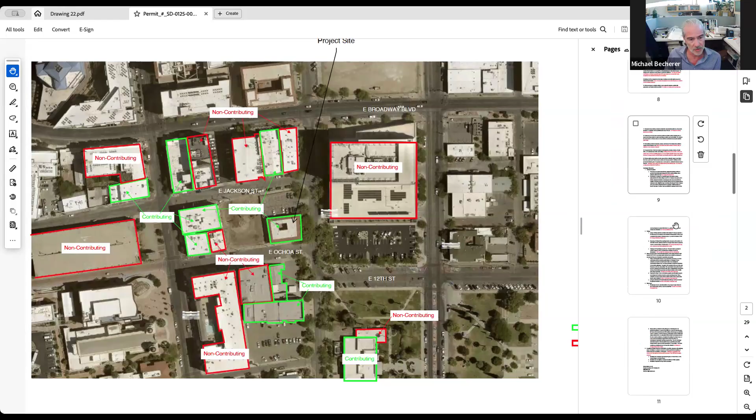If I jump forward a bit here, here's the drawing of the site plan. As I mentioned, to the exterior of the building, we're simply restoring it. The previous review was the minor review for the exterior of this building. The exterior was sprayed with Tuftex, similar to the Marist College, and it has asbestos in it. So we wanted approval to have that removed. We'll be restoring it to more of a sand finish, smooth finish that would have been historically accurate.

The upper band has about a 6x6 tile pattern scored into the stucco, so we're going to be restoring that, along with the crown molding that will all be restored. Everything got sprayed, so the crown molding got sprayed too. We have to take that texture off of everything, but we'll be cutting new crown molding because we can't get that Tuftex off due to the condition of the crown molding.

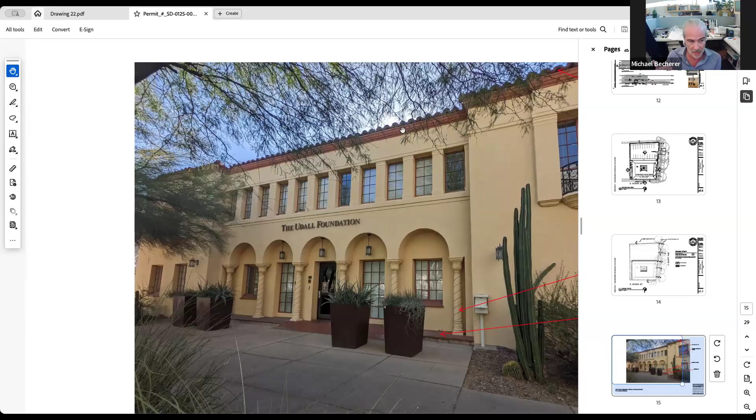But we'll be cutting new crown molding to match the existing, so we'll have a custom blade made to do that.

What you're seeing here is the front of the building. Let me go back to the plan. The building faces Scott Avenue. On the north side, we have the parking lot. The front door is in the center of the east facade, and that's where the modification for accessibility will be. The south facade is on Ochoa. The west facade will now be facing the new 7-story senior housing project going up next door.

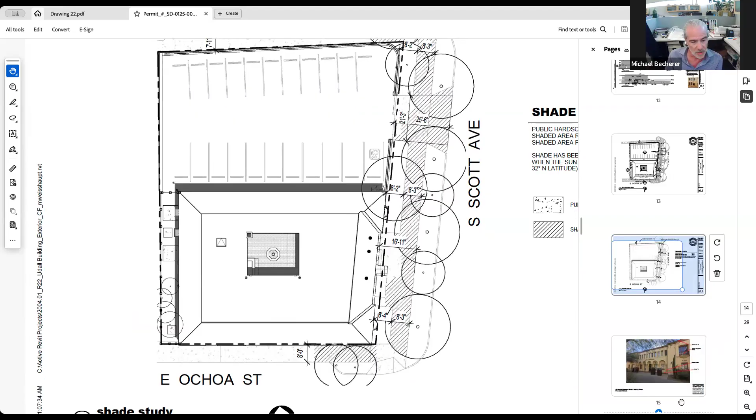From the perspective, this is the front of the building. Hang on just a second, I've got some noise in my background.

Sorry about that. So this is the front of the building. These are the light fixtures we were discussing. If you walk by the building today, we've taken these down as we've been doing work to the building, but we have them. Depending on the outcome of these discussions, we'll determine what we do with those.

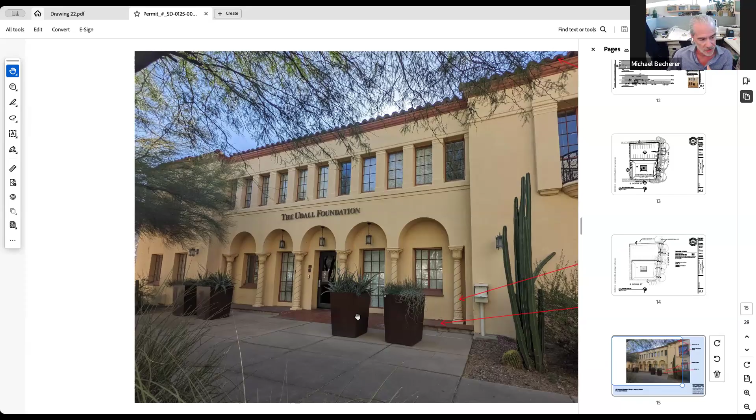The other thing to look at in this photograph is the stoop here. If I zoom in a bit, you can see that at some point in the past there was an actual step that was a stoop, which was then cut out, and a kind of clay kitchen tile was put in to create the slope for accessibility. This is not actually accessible, though—it's much too steep.

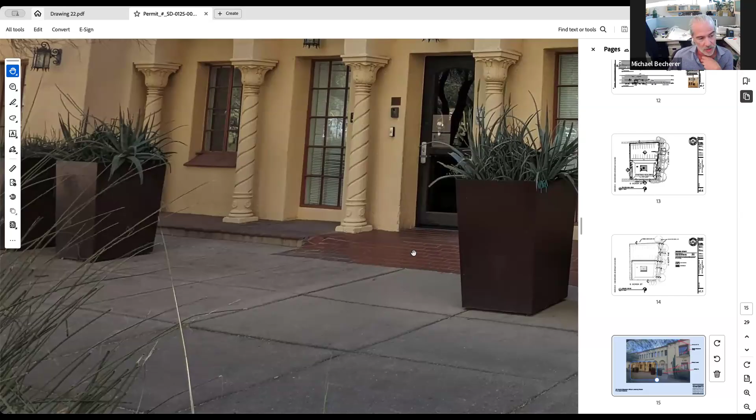So what we have done is go in and basically modify this, and I'll show you those drawings in just a second. I want to give you context of the rest of the building first. From a color perspective, we will be painting the building to match the existing colors, and if we do decide on a color change, we will come back and ask for either a minor review or come back to the commission.

This is the east facade, and this is the south facade. There's another fixture over the back door that didn't come up in the DRB meeting, but full disclosure, that is there, and it's another one we've saved and will reinstall depending on the outcome. And then this is the west facade—again, this facade will be completely concealed once the building next door is complete.

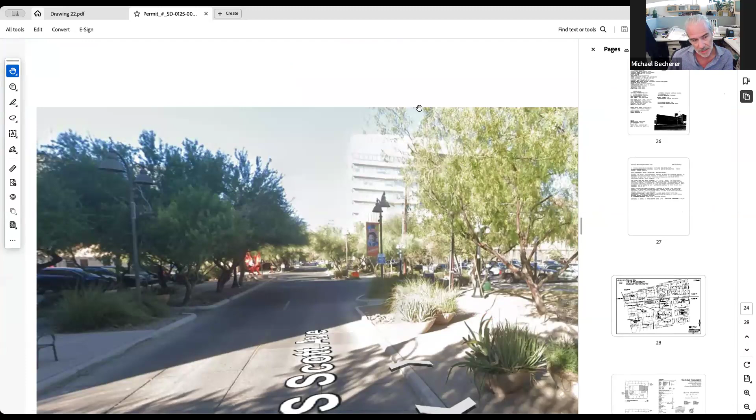And the rest of this is just street context photos. So again, to be completely transparent, because we did the TI, we could not get a certificate of occupancy without having the accessibility resolved. So this design I'm showing you has actually been installed—I'll show you photographs. We understand we did that at risk, so I expect you to review this as if it's a proposal.

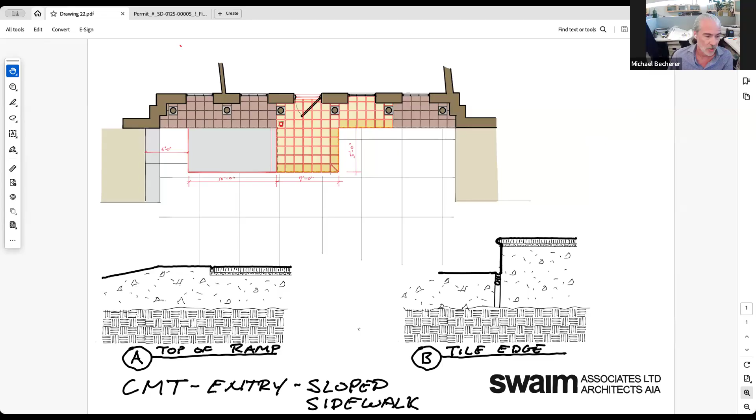I do understand the situation we're in. What we're proposing to do to the front stoop—you can see this darker tile color is the existing tile. The light yellow that was there was all replaced anyway, so we did not remove any original material. What we've proposed is to replace that with Saltillo tile to match the existing. We are extending that out 5 feet and then running a ramp to the south, basically to create the accessibility into the building. Then we have to extend the sidewalk a few feet to get the landing at the bottom of the ramp. So this is less than 6 inches as a rise—basically one step.

Because of that, like other curbs in downtown, no railings are required, and we're not proposing them right now. We've had this reviewed by the building official, and they've accepted our installation as we've proposed it.

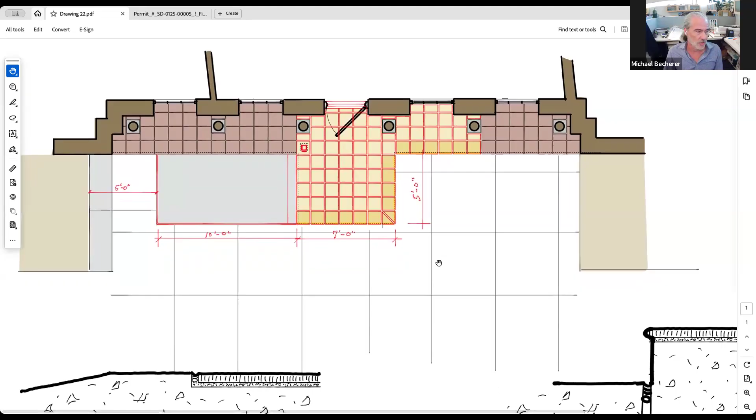Let me stop sharing this and share something else. I do want to show you the photograph of the actual installation.

Oops, that's not what I wanted to do.

That's another reason we did not want to provide a handrail, again trying to minimize the visual impact to the historic building as much as we could. It's just sort of a detail.

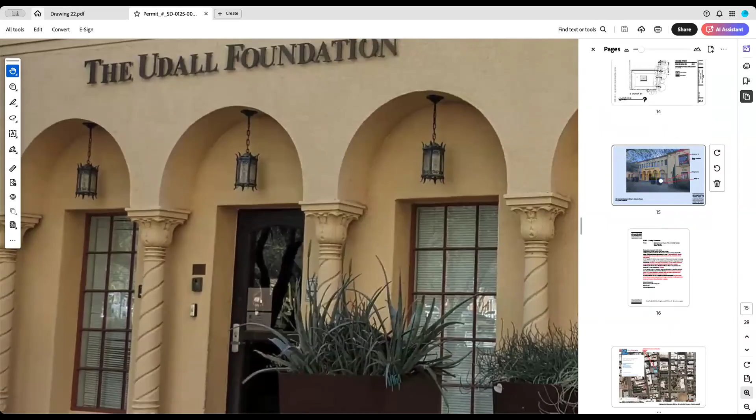As we discuss this—is that pattern glass, Michael? It does have a pattern to it. It's slightly milky and opaque. It's not completely opaque, but it is a pattern glass and has a bit of texture to it.

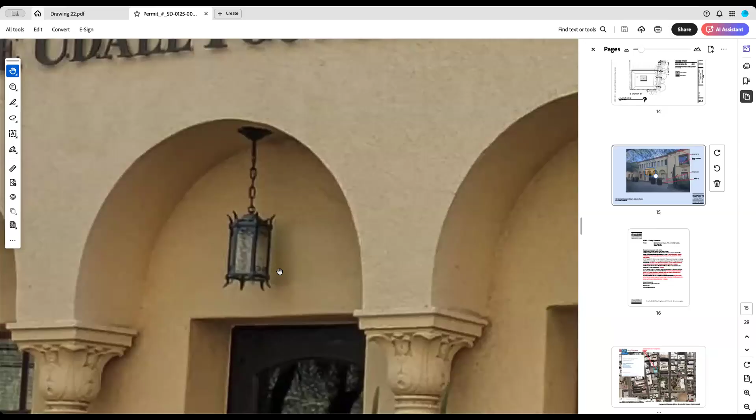Is one possibility that we recommend that you continue to explore ways to get these made compliant? Yes, just wanted to bring that up. That is one option. My intent is I still need to complete the outdoor lighting analysis anyway, so we still need to submit that as part of all this. And if we come back, I don't have a problem coming back and presenting the light fixtures.

Michael, we used - and I can't remember the name - but we used a pretty great fabricator for the courthouse light fixtures who helped with restoration. I'll get with Liz and find the contact and send that to you. They might be helpful, they do a lot of rehabilitation for light fixtures and can get them to comply. I don't know about the dark sky requirement, you might have to put a little shielding in there or something, but it'd be worth seeing. Thank you, Savannah, that'd be great. So that's one thing we could do.

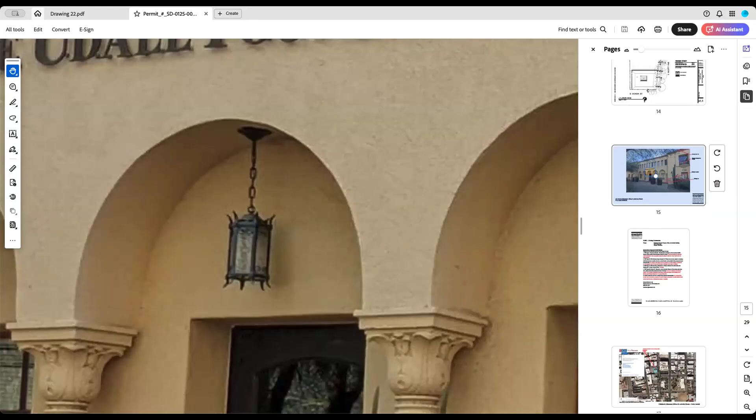So, commissioners, do we have questions about the front stoop, the accessibility, and the thoughts on the light fixtures? Savannah, do you have any other thoughts? I like the idea of rehabbing those fixtures if we can do it. No other comments, I think what you're doing is appropriate and respectful. So it's all good.

Thank you. Joel? Do you have anything? You're muted, Joel. You're muted. Joel, am I unmuted? Yes, you are. I'm sorry, I was having trouble getting unmuted, I don't know what the deal is.

I don't have any real questions other than, do we know when this stuff was sprayed on the building that you're having to tear off everywhere? Likely in the 70s, that seems to be when this product was used a great deal. It is delaminating in several areas, so we're not taking the stucco off, we're only taking off the tough tex itself as much as we can. It's only about 1/8 of an inch thick. So the abatement process will simply remove that, and if there are areas where the stucco comes with it, then we'll go back and repair the stucco as necessary.

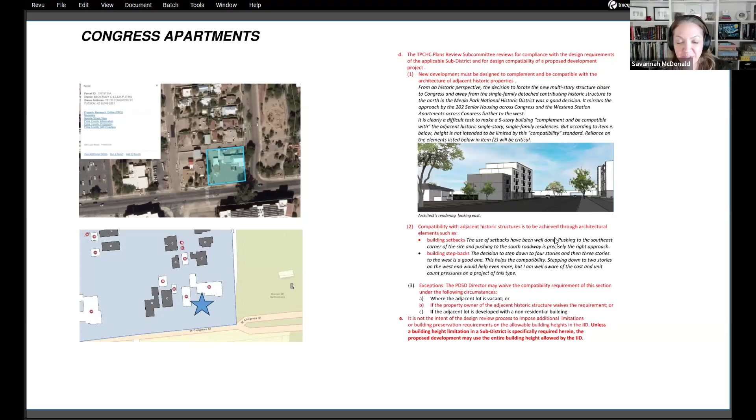All right, next slide, please. Okay, Savannah started to say something, but I didn't hear you. I said proceed when you asked. Oh, okay. All right, all right.

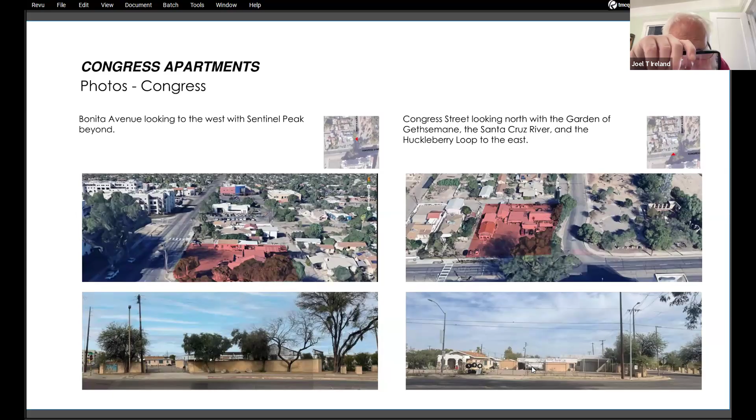So again, this is an aerial photo of the site. This is essentially one building with several sheds around it. This is a house with an outbuilding here, so that's the site there. This is looking to the west, and that's the site. This is the east edge, along there in the aerial, and this is the south edge of the site here.

So is everything in that shaded pink, red area going in, or is the historic home staying? The historic home is this one, do you see my cursor? Everything else is going into that pink area. That's correct. Okay, all right.

These are just photographs. This is Congress looking east, that's the Sentinel Plaza Apartments. This is the site here, basically on the west side, north side of the street, sorry. This is at the intersection of Congress. Congress runs this way, and then you're looking north on Bonita. The Garden of Gethsemane is on the right, and the site is on the left.

Okay, just so I get my bearings, in the bottom left-hand picture, we're looking down Congress toward the east, toward downtown? Yes. Okay, I got it. Good deal, perfect. And this is looking north there. Got it, thank you so much.

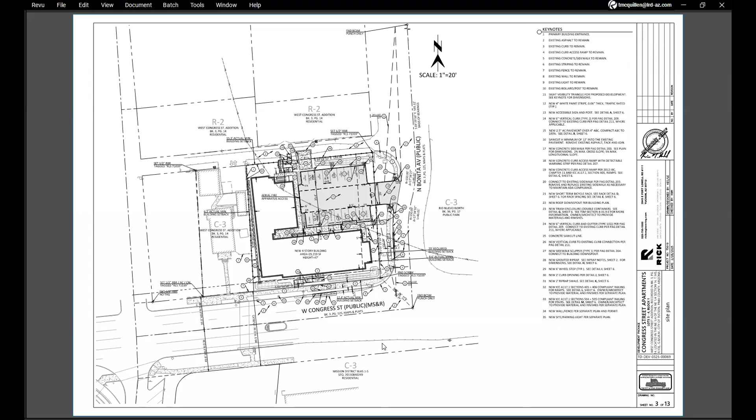Madam Chair, if I may make a suggestion, that we do the presentation and show the proposed plans and then come back to discussion. Okay, thank you, all right.

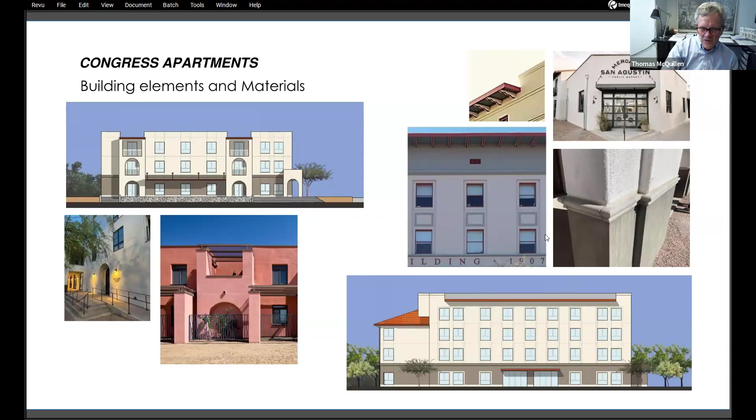This is the side of the building that faces west. This one faces south, and this one faces east.

Part of our discussions, we initially went back to the site plan. Initially, the building stopped here and there were 4 parking spaces. When we met with Ward 1 offices, Lane Santa Cruz asked us why we needed those 4 spaces, and couldn't we provide more housing further back this way. So that's in part how the building grew a little bit more back in this direction.

So I know I jumped around a lot, but I'm happy to go back to any of the slides. May I just go ahead?

I wanted to ask a question about something at the DRB meeting. The second proposed development across the street, which is outside of the HPZ, was also presented there. While the purview of this commission is just within the HPZ, some questions came up about moving height or units from this apartment development to the one across the street, which is only proposed at 3 stories now. So I was wondering if you had any response to that. Is that a possibility?

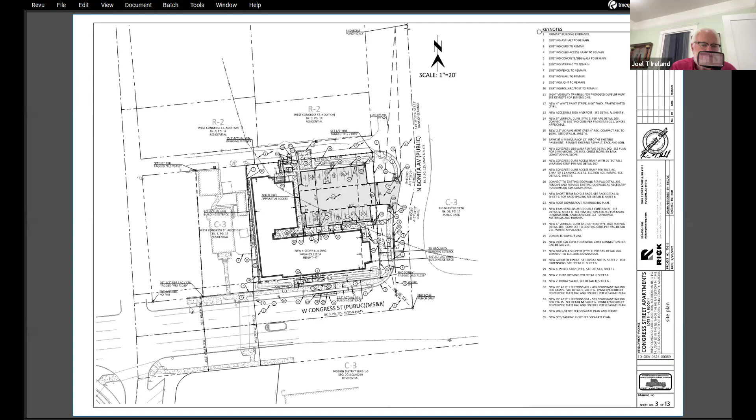Just to follow up on that, where is this other project that's being talked about? Is it the other side of Bonita? No, it's here. So this is the project we're talking about. Oh okay, this is the other one on this side.

It's 3 stories for a specific reason, having to do with the stepping down of the massing from Sentinel, which goes from 6 to 5 to 4. This one goes to 3, because in general that was initially the idea, to bring the scale down as you went further away from downtown. So anyway, that's what is on the agenda today, Madam Chair, is actually the Congress Street apartment.

Yeah, okay, that's clear, I was just curious. And Ms. Majeski, members of the PRS, the Linda apartments are not going to be reviewed by the PRS because they're not adjacent to any designated historic site or structure, or eligible to be designated as historic. Understood. So we're just focusing on the Congress apartments. Yes.

And I apologize, because by presenting them together it made it appear like it was one development, and that's really my own ignorance, because it truly is 2 completely separate groups, and the financing is based on the configuration of the buildings. You can't take a story off of one and put it on the other.

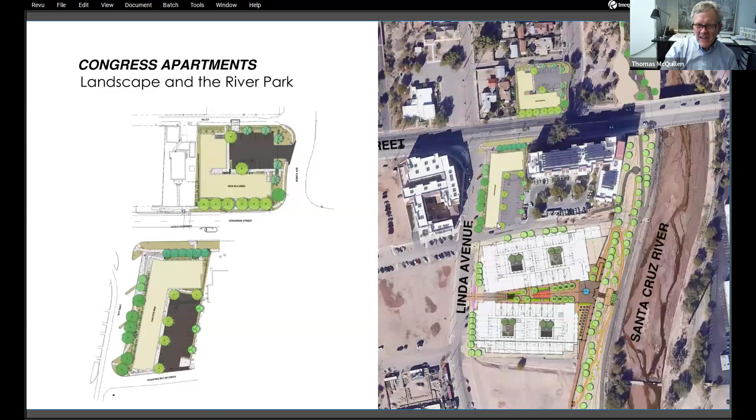It's 5A. So it depends, I guess, on the fire separation from the property line. No, you're correct, actually - it's not that close. One of the constraints is there are high tension lines on this side, so we had to be 20 feet back from them. So we're not close to the property line in terms of fire protection, but I think you're right, that elevation could use help.

My only other thing that was nagging at me a little was the roof at the west elevation. There's a sloped roof - I'm assuming it's a tile roof - that cuts the higher parapet, and the logic doesn't follow what happens below. It cuts like in the middle of a bay of windows. If that was inspired by something like the MacArthur, usually that logic of the corner tower element follows through as a mass turn. So I would look at that, if you want the pitched roof plus the parapet, finding some logic with how it relates to the windows below and the general massing. Do you see what I mean?

I think I do, but are you talking about... Oh, I meant the south elevation, I apologize. This one, this side. The pitched roof ends like right halfway above the windows below. I wish I could draw on the screen. Do you know what I mean? Like if you go back to the MacArthur example. Okay, let me go down.

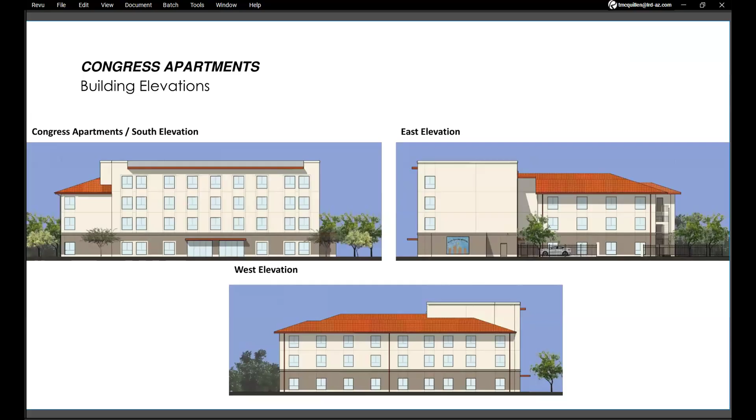But there's no playground or anything, so it's really not families. Are they just one bedrooms? No, they're a mixture, but there are a lot of studios, one bedrooms, and they're called parallel one bedrooms. The project across the road has some two bedrooms, but it's primarily aimed at single people or couples just starting out. The development group has done, I believe, 20 of these, mostly in Utah, but also they have projects now in Mesa and Phoenix. They turn out to be very successful and popular, I guess, because there are a lot of people on their first job who can't afford the cost of apartments, like 3 of my kids. So that's kind of the target market.

Cool. Well, thanks for sharing. I appreciate that, and I appreciate the input from everyone. I don't want to take too much time, but I wanted to see if Andrew had comments.

Just a few. All Savannah's comments were great. The only thing I could add would be to find some opportunity for more relief in these elevations, maybe at the south entrance, so it could pop out or in, or somehow delineate itself so there's a clear front to the building. Yeah, I think that's a great point. I'm sure balconies are out of the question, but it'd be nice if there were some.

Balconies were a hot issue for the neighborhood. They generally were against balconies, primarily overlooking adjacent residential areas and stuff. So we don't have them here, but we do have them on the other side of the road. The privacy issues, I get that. I guess your only opportunity for them would be on the Congress side, since you face another building.

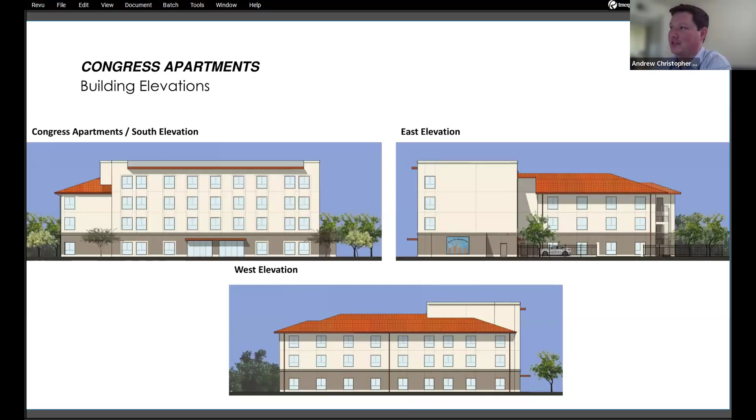It's painful to sometimes bring things you did a while ago. But we think it's gotten better. Yeah, it's helpful to us that you show that sort of evolution of your thinking. I encourage you to take these suggestions, and sometimes on projects of this scale, we even do a second courtesy review before you come back with the final, if you have anything you quickly want to review. But I would suggest you work with Michael and Desiree on how you're moving forward with your plans, and we look forward to seeing the project when you've got a full review.

Well, I appreciate all the comments, and I appreciate the fact that it's sort of a continuation of what Corky had given us, which was actually really helpful initially.

Ms. Majeski, members of the PRS, just to let you know, the design professional will be Rick Gonzalez, designated to this project. When we realized we were losing our former historic preservation officer, Rick Gonzalez, the design professional, was out of the country. That's when we reached out to Corky. So basically, Rick Gonzalez did the design professional review, and then Corky did the preliminary for historic, because at that point we had lost our HPO. So moving forward, it will just be Rick Gonzalez.

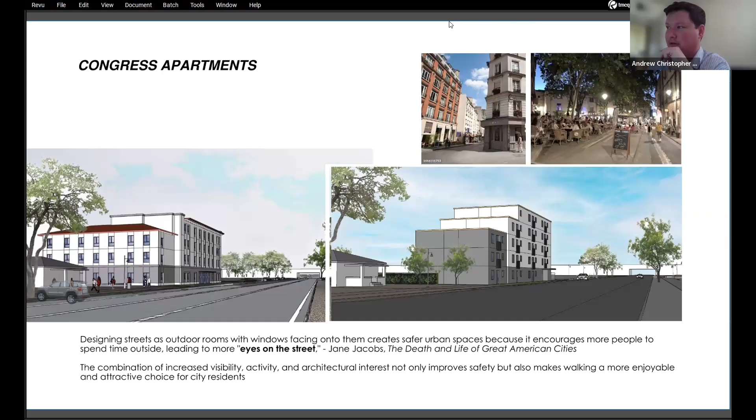I do have one question, not for you Tom, but maybe for Desiree. The house that's being torn down as part of this is listed as a non-contributor on the registration form, and I'm kind of wondering why, because it looks like it's in the period of significance. I don't know, it might be worth looking into if that house is correctly classified. I would have to do some research and look into that, but I can follow up.

This isn't the one that is remaining, right? It's a different one. This is the one with the little porch on the front of it.

Like the arched porch on the front of it. It looks like, at least from the plans, that would be torn down, along with the car repair place. Yeah, it's great to ask Desiree to look into that.

Yeah, I'll do that. I think it was looked into almost a year ago when the developer first looked at the site. But it's always worth checking.

The inventory form has it as non-contributing. Just not sure why, but it's okay. It's not that pretty of a house, so I won't cry about it. Just a little.

So this is Santa Rita Park. Just wanted to talk about the implementation from the master plan all the way through construction, and then showing the condition of the pool house as well, along with pictures, like Desiree said, that were part of the form that was filled out, just so you can see that it was documented that way.

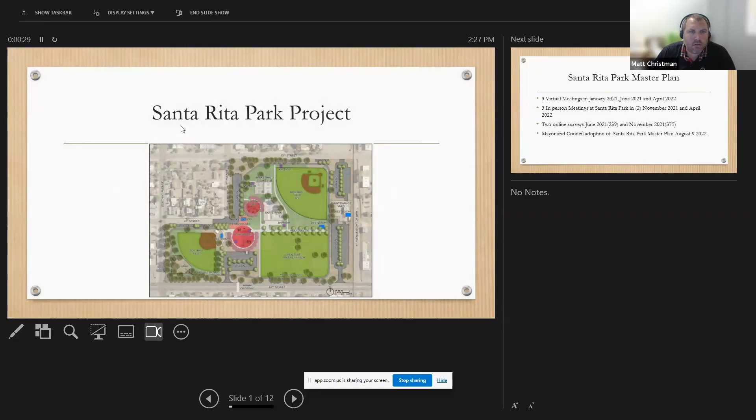So, the master plan for Santa Rita Park. When we started the master plan process, we did 3 virtual meetings in January of 2021, June of 2021, and April of 22. And then we did 3 in-person meetings at Santa Rita Park, 2 in November of 21 and 1 in April of 22.

We did 2 online surveys to get the community input for the master plan concept. We had 239 participants in that survey in June of 21, and 375 participants in the survey in November of 21. And then Mayor and Council adopted the master plan for Santa Rita Park August 9th of 2022.

So after that, this is the master plan concept plan that came available as part of those different surveys. It was to have the open turf area and free play in the bottom right-hand corner, closing down 3rd Avenue and putting where the existing connection is, have that connection off of 3rd Ave become a parking lot.

And then on the left side, the initial master plan concept was to have a dog park in the corner of 22nd Street. And then making a big plaza area, since we are closing 3rd Ave, to have a plaza area where the community could come and gather.

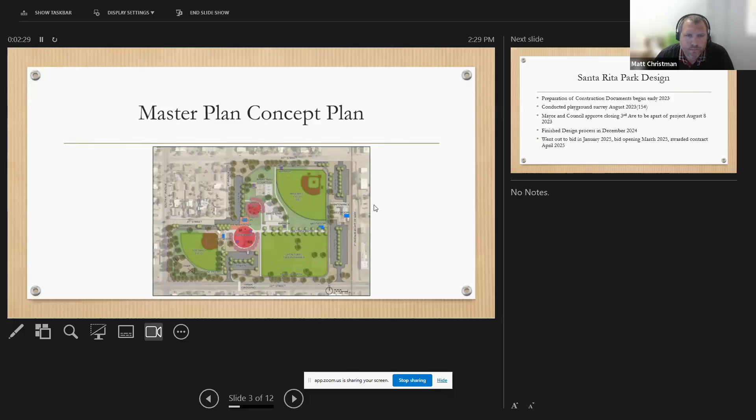So then to get into the park design process for Santa Rita Park, the preparation of construction documents began early 2023. We conducted a playground survey in August of 23. We had 154 individuals participate in that survey to select what they wanted to see in the general playground layout for this project. And Mayor and Council approved closing 3rd Ave to be a part of this project August 8th of 2023. We finished the design process in December of 24.

We went out to bid in January of 25. Bid opening was in March of 25. The contract was awarded in April of 25.

So with the scope of this project, some of the new amenities are, like I said, the new restroom, a new playground, splash pad, plaza area where we're planting throughout the whole park. We're planting 300 trees and 300 shrubs throughout this project. And then we're putting a walking path with DG and asphalt.

So the asphalt path is 10 feet wide, and the DG path is 4 feet wide. We're going to try and preserve as many of the trees along 22nd Street as we can with the walking path, because the walking path does go around the whole perimeter of the park. And then, like I said, we have a new parking lot going in.

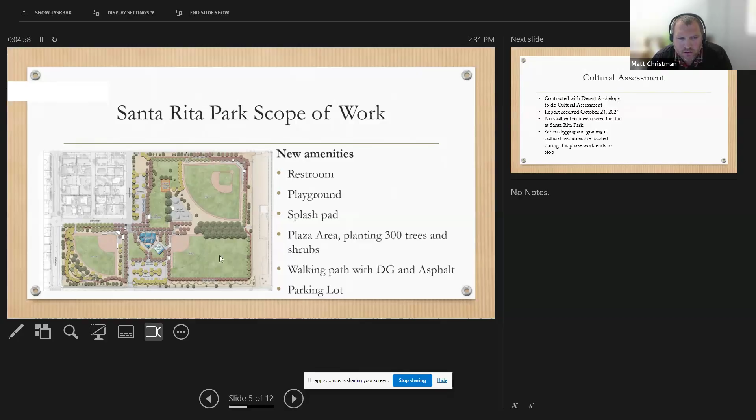So we did a cultural assessment. We contracted with Desert Archaeology to do the cultural assessment. We got the report, which was received October 24th of 2024.

There were no cultural resources located at Santa Rita Park, but in the report they did say when digging and grading, if cultural resources are located during this phase of work, obviously we need to stop and get it monitored and do that. So it was more of a surface area assessment; they didn't dig down or anything like that.

So then we had Westland Engineering do the archaeological assessment for the amenities to be demolished, part of the Santa Rita Park project. Documentation was completed December 7th of 2022. As part of that documentation, they partially completed the Arizona State Historic Property Inventory form for the pool house and pool. We asked Westland to perform the rest of the evaluation of eligibility assessment. I'm hoping to have that tomorrow, they said they would have it by the end of the week.

The pool was opened in 1942. The pool underwent renovations in 1980, where they added a kiddie pool. The dressing rooms were converted into storage rooms and covered with a shed-style roof. After the 1980 renovations, no other renovations have taken place at the pool house and pool. Photo documentation was part of the report by Westland, and I'll get into some of those pictures in a little bit.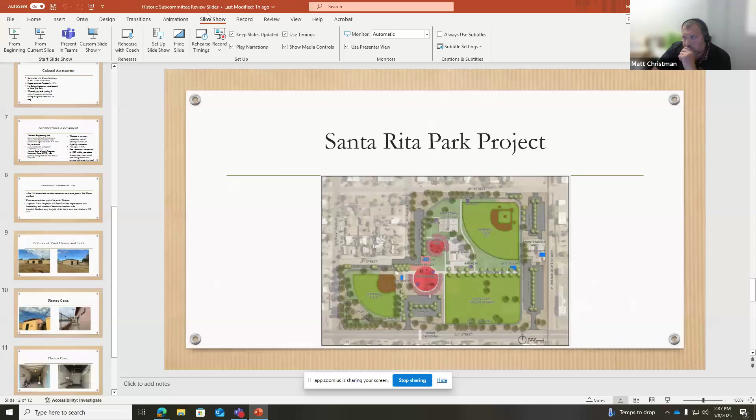Okay, who would like to start with questions? I can start. Go ahead.

I would really, really encourage you to not tear down the pool house - forget the name, the central building of that pool house with the tile roof. Just looking at the plan, I don't understand the reason to tear it down completely. There doesn't seem to be any programmed activity in that area that wouldn't be possible if that pool house were to stay. Currently the bathhouse is right here, and we're trying to put in multi-purpose fields in that area - three multi-purpose fields. The way it sits now, the pool shell intrudes more toward it, so that's something we could look at, but it's about figuring out exactly, because having a building when you're trying to play soccer or ultimate frisbee, that kind of stuff, is an issue.

So that's the reason why we were trying to demo it, because currently the pool hasn't been open since 2006, from my understanding. So we're just trying to make it an amenity that more individuals can use, and we think the multi-purpose fields could do that.

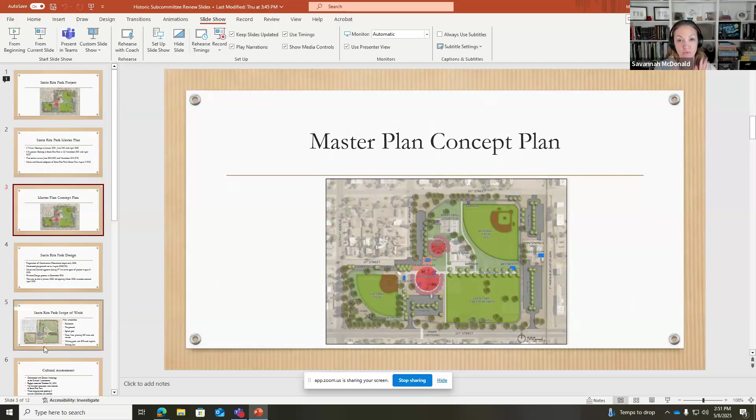I'll let Joel go. So currently, where the dog park is proposed, instead of just having a DG area, we are putting some plantings and trees in that area as well. So that could be something that gets incorporated into the dog park, where down the road they would have some shade inside the dog park as well.

Okay, thank you. Joel, did you have anything? You're on mute. No, not at this point. I don't, no, thank you though.

Okay, thanks. And just commissioners, Andrew put a photo in the chat showing the bollards at the exit of that one area. I was just mostly curious what was happening there and why the parking was reduced. But if there's no big events, then I think less parking is always ideal.

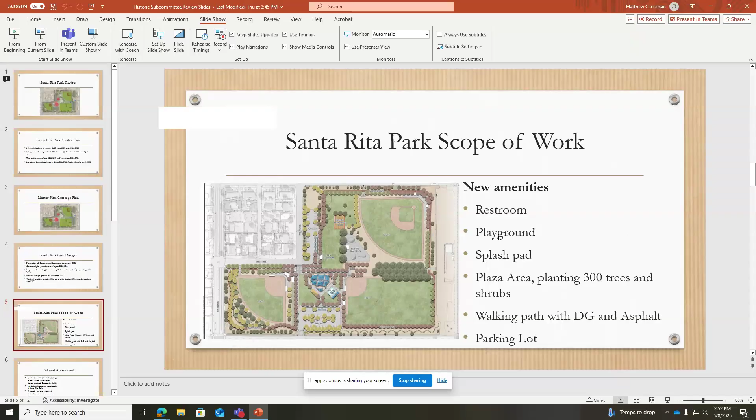Yeah, I'm sure the neighbors would appreciate it. So Desiree, what will happen when you get that HPIF completed? Well, ideally the timing would have been different, or the order, right? We would have had that first, at earlier stages of the park planning process, and you all would have been able to weigh in earlier.

So I know it's hard because we don't have an evaluation, but I have heard comments today of interest in preserving the red clay tile roof portion of that building. That was what the Tucson Historic Preservation Foundation was asking for. They weren't necessarily asking for retention of the pool or the other portion. So if that is something, a comment that this body has, then that can be recommended. Again, this isn't an HPZ, nor is it a federally funded project.

It's a city-owned property, though. It's a city-owned property, right. So, with potential historic resources, right? Right, and so that can be taken into consideration in the design. And then also keep in mind the picnic tables and benches.

And then there was also the comment that there's an opportunity here to include the history of the pool house, perhaps in oral histories and the interpretive aspects of the design. Yeah, I think we've got that.

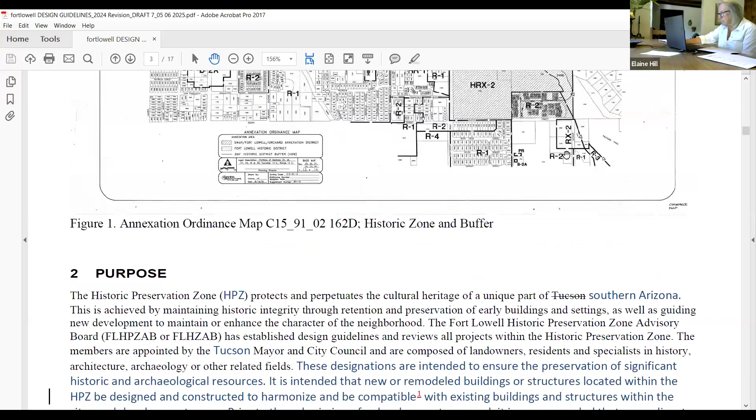Hey, can you see my screen now? Yes. Okay. Now, Elaine, is this the version that contains your strike-throughs and additions, or is that a different version you made? No, this is the version that you have. Perfect, okay. So you see, these are the strike-throughs, and the additions, right? Yep, okay.

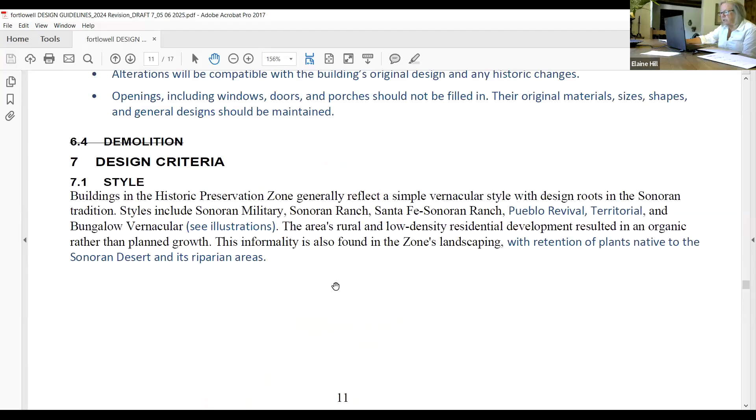And I think this is where we stopped, with design criteria — excuse me. These are the illustrations. Yeah, and I recall that Andrew had a comment about the images.

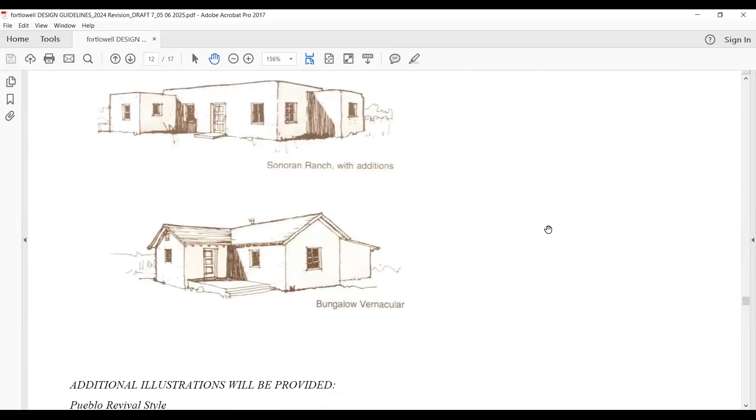Was that — do you remember that, Andrew? I think maybe it was Savannah, but okay. I think we had talked about maybe if there was imagery for, like, I forget what we called it, the Sonoran vernacular, or there was some style that's referenced in the text. If there was like a description or the images themselves. I think there was a description, like maybe above this section.

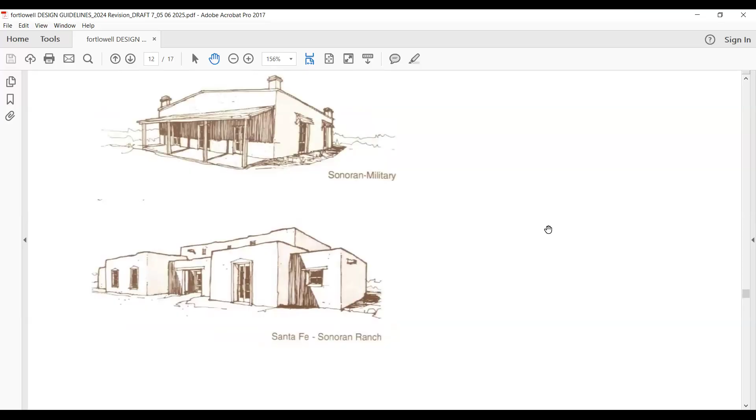Bungalow vernacular — there it is. Bungalow vernacular, yeah, something. I think maybe it was Savannah who flagged that it might be good to have something like that as one of the pictures, illustrated. But no, otherwise I think the illustrations are good. Okay. So we would need to get probably an architect to do those descriptions.

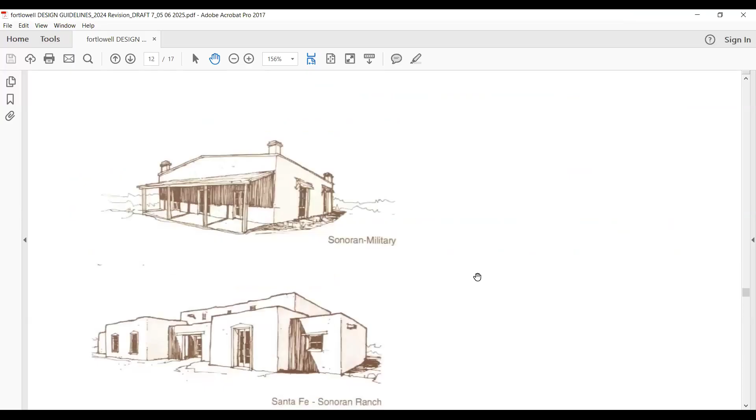And a quick little sketch, maybe, or a sketch of it. Well, the sketches, these are here, the illustration. Is there one in bungalow vernacular? Yes, that one. Oh, perfect. Okay, all right. And then we're planning to have these two other styles. Okay, that was it. Yeah, I think my memory's jogged.

I think what we had discussed was maybe just breaking out the individual styles and giving a description of each of them, like character defining features of those styles, so that they're more defined. Because that would be helpful for people doing things, or for even this committee, the subcommittee doing reviews, and for people to think about the character defining features of their building.

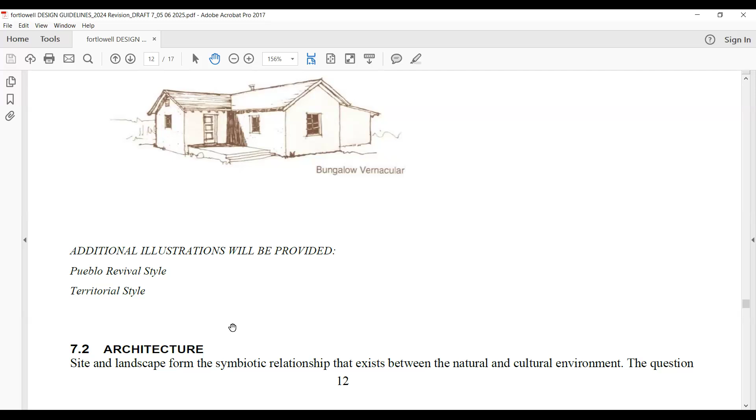Yeah, okay, I think so. I think that's really helpful, because oftentimes people don't think about that when they think about changing windows or placements or orientations. Right, okay. We'll have to find someone to do that in the proper way, I think.

So for this other section, as far as moving on from that, site utilization setbacks. Should we just go through these? Yeah, we want to look at those.

Comments? Is this a new comment, a new addition that you put in that we hadn't looked at? This is, if you can see that blue text. Blue text is what's been put in since the last version of the guidelines, which was 20 years ago.

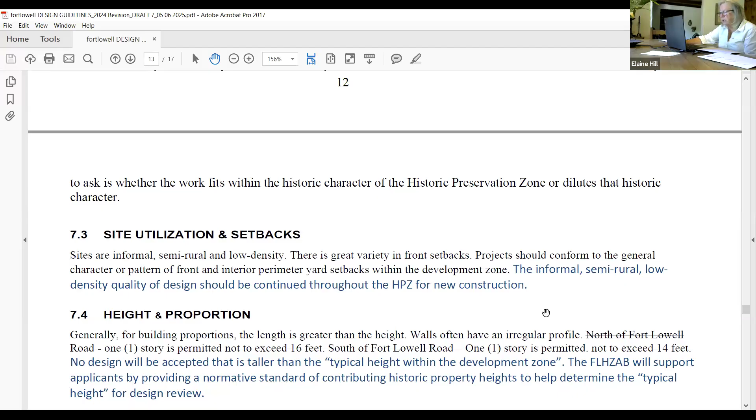So you've got your edit function on, right? In that first line of this section, could you put a comma after semi-rural? Actually, this is a PDF, okay, then just, because it's easier to display. But I will, yeah.

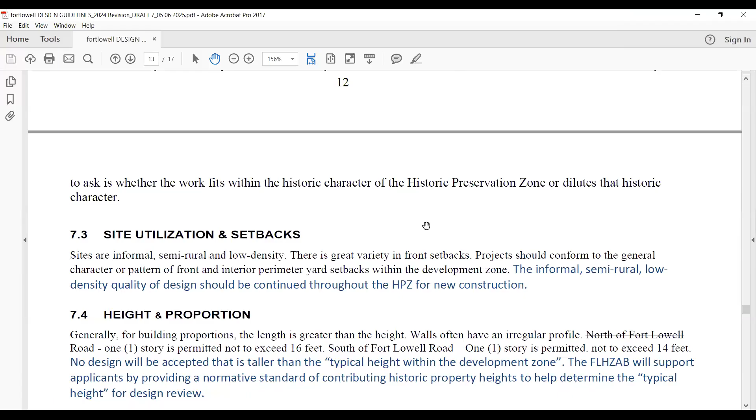Okay, so front setbacks. I think my comment here would be in the blue text, since we're talking about site utilization or site planning, where it says the informal, semi-rural, low density quality of design. I think quality of design should maybe be like site design or site layout.

I don't know, site planning maybe. Because we're talking about the siting of- It's really the layout, isn't it? The layout of sites, site use is informal, well, yeah.

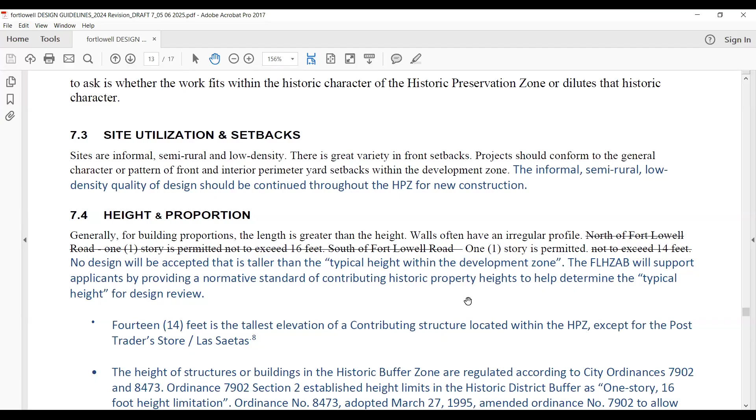Does that make sense, Elise? Mary Lou is my note taker, so I'm counting on her to capture the specifics. Okay. Right, Mary Lou? Okay, any comments on- other comments on 7.3? Okay, and let's look at 7.4.

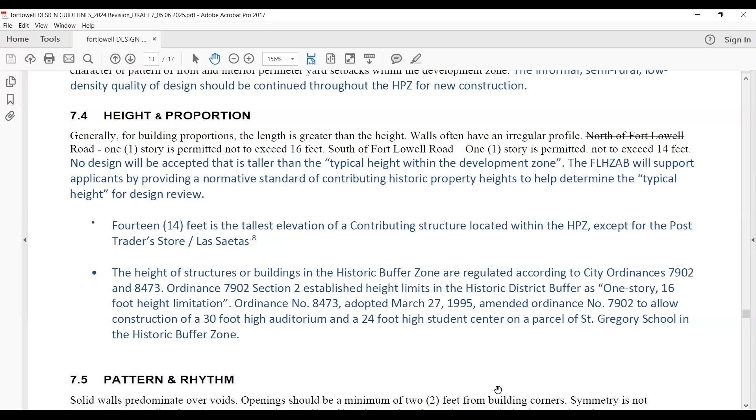Comments here? No, I think I'm good with this section. Yeah, I'm fine with it too. Joel, are you okay with it? Joel? Just give me a half second here.

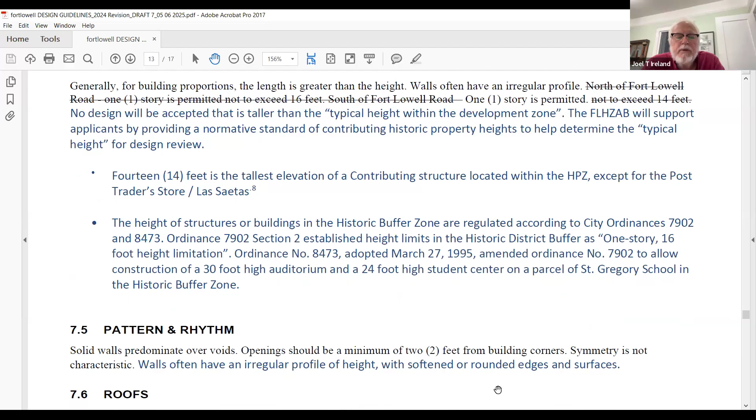It's section 7.4, that's what I'm going through. The additions in the blue part, right? Yep, and I can do both on regular course. Okay, yeah, I'm okay. Okay, thank you. 7.5.

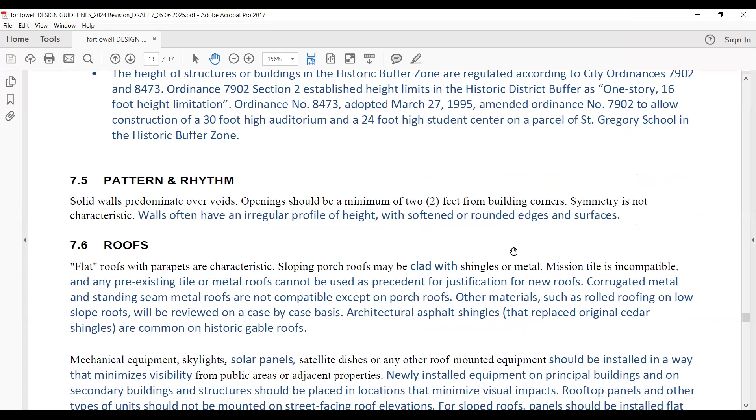7.5 is rhythm, and the addition had to do with irregular heights of walls and softened, rounded edges of walls. Oh, just a second, Moses. Okay, yeah, that's good. Okay, 7.6. I'm okay, yeah.

You might add at the very end of that, where it says architectural asphalt shingles that replaced original cedar shingles are common on historic gable roofs, you may say gable and hip roofs or something. I really don't think we have any hip roofs, but I will. Or really, it's just any roof that's steep enough, I guess.

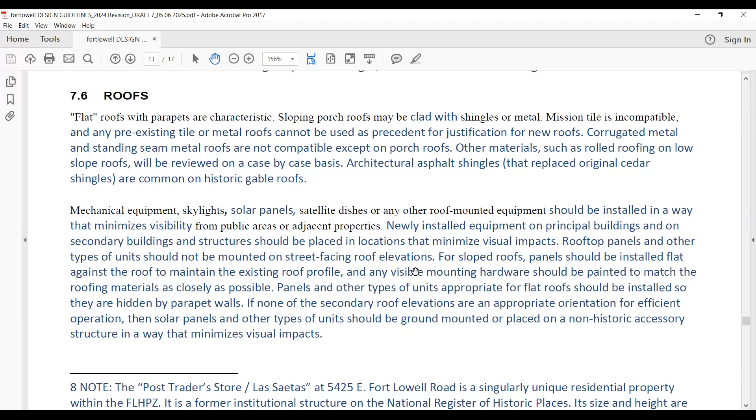Yeah, I'm okay with that second paragraph too, because so many people are wanting to put solar panels in, right? There's got to be some guidance on it. Newly installed equipment on- let me just read real quick, sorry. I'm gonna put it on mute for a second.

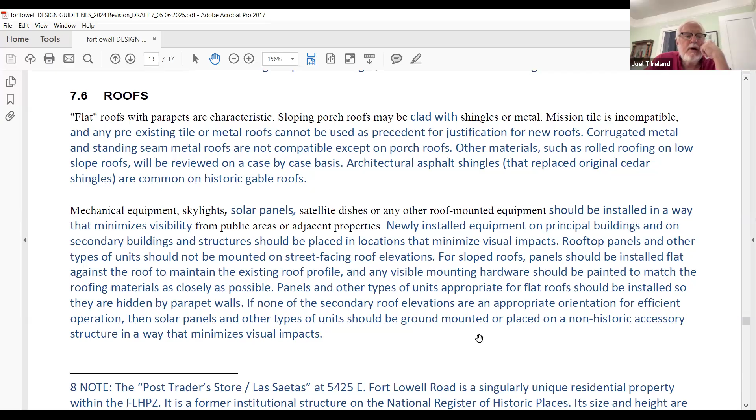Okay, anything, Joel? No. Are you good? I have no issue with anything in 7.6. Right, okay.

Okay, and just, I want to comment on that note. It's a good idea that you mentioned that because you say that's higher, but you talk about it because you don't want people edging up to the height of that building, correct? That's right. In other words, good, it's distinctive and not characteristic of all the other structures in the zone. Yeah, and it's an outlier in the sense that it's an institutional structure, right? It's not residential, so it's good to call that out. So thank you. Well, it is now residential, but it wasn't originally.

Okay, texture and color. This addition has a lot more detail about, well, first of all, it talks about adobe, stabilized adobe, conventional cement plaster versus lime plaster. In the first paragraph, it talks about when repairing that masonry, to use consistent or to be consistent with whatever the masonry is.

I like the fact that you talk about the stucco and don't use very much cement plaster, because that will ruin everything. Nice, a lot of detail. Yeah, good.

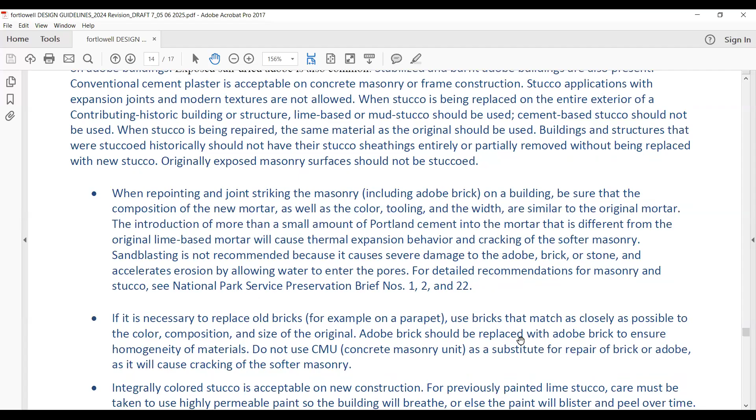Madam Chair, can we just clarify one thing? Elaine, can you go back to the section on solar panels? I see a statement here that they should not be installed on the street facing facade. So if, during the review, a solar panel is installed on the street facing facade and it is flush mounted, is that allowable?

Because it says the unit should not be mounted on the street facing roof elevation. But if they are flush mounted, like 3, 4, or 6 inches from the roof, that is kind of flush mounted. Can they do that? Because the code does not really discourage that, it only talks about minimal visibility from the street. So should we have this kind of restriction? That's all I'm asking.

You're talking about on a sloped roof? I'm talking about this statement: the type of unit should not be mounted on the street facing roof elevation. If you look at solar panels we've done in Fort Lowell, even on the street facing elevation, they are kind of flush mounted, very low down, the lowest they can go. My question is, is that allowed?

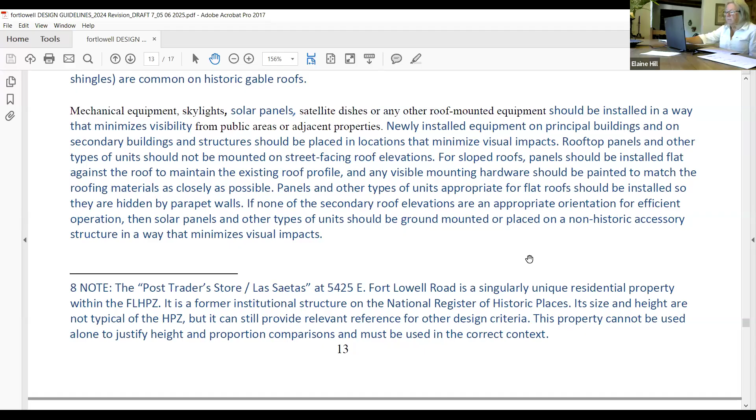Yep, and we've been through reviews too where we find they can move things back and it's not visible. Right, it depends on where you stand - I've seen those too where you think it's going to be bad, and then you look and it's not really bad. Okay, so thank you, good catch Michael, good discussion, thank you Madam Chair.

Okay, let's go back to... okay, we're back to texture and color. Wait a minute, Joel, Michael, is that satisfactory language? That'll be fine. I've been on a lot of these panel reviews with you, and I just want to make sure you're comfortable, because I know this is a big issue for people. I think they're willing to modify the wording so it's not so direct. So long as that's modified, it will be okay. Good deal, thanks for the clarification, appreciate it.

Okay, so back to texture and color. The first part just talks about Adobe and stucco. The next piece talks about repairs of masonry, including Adobe, and addresses replacing old bricks with old bricks, or Adobe bricks with Adobe bricks.

On the first part of this section, I think there's a lot of confusion, especially by people that aren't used to historic plasters. Your average subcontractor is just calling everything stucco. But to me, stucco is a Portland cement based hard material, and plaster is the softer lime and mud.

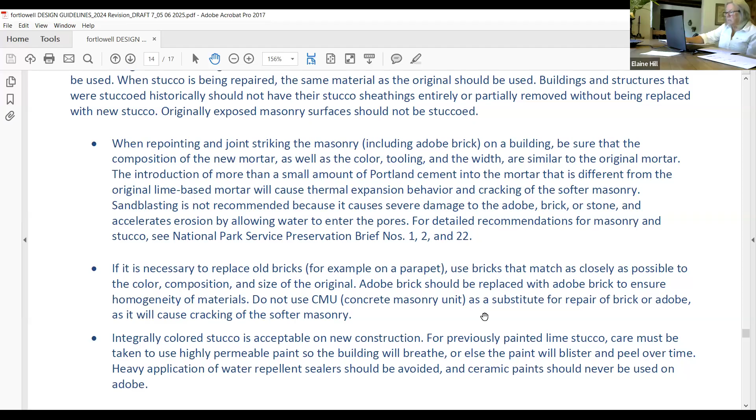I think there's some mixing of the wording in here. If you scroll up, that second sentence says use stucco, lime, or mud plaster with smooth or sand finish on adobe buildings. I would just say use lime or mud plaster. We want that distinction between stucco, which is a Portland cement product, and a lime or mud plaster, which has no Portland or very, very little Portland. That distinction needs to be super clear.

You might want to say something in the beginning, that adobe buildings with lime or mud plaster are most characteristic, because it promotes breathing and allows the adobe to be preserved.

Andrew, do you want to do further review of this paragraph and then send it to Michael to get to Elaine? I wouldn't mind looking at it either, because I worked for years on adobe buildings. Communicating that to people is super important for the long-term life of the building. Thanks, I appreciate you really trying to go into more depth here. I'll add my notes and send that over. Yeah, that'd be really helpful.

You're right, Andrew's right that contractors don't always understand that distinction. And the bags often say 'contains lime,' so that adds to the confusion.

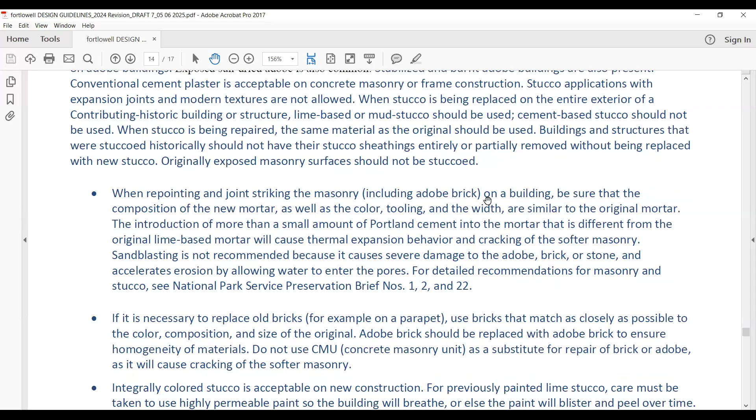I'm happy with that if that's done. Integrally, excuse me, I'm good with that, the color discussion there. I think we should just review that whole section, Andrew.

Yeah, will do. It will help because this was part of a project we faced, one project that Andrew was helping us work on in Fort Lowell, where the contractor wasn't using lime plaster as specified.

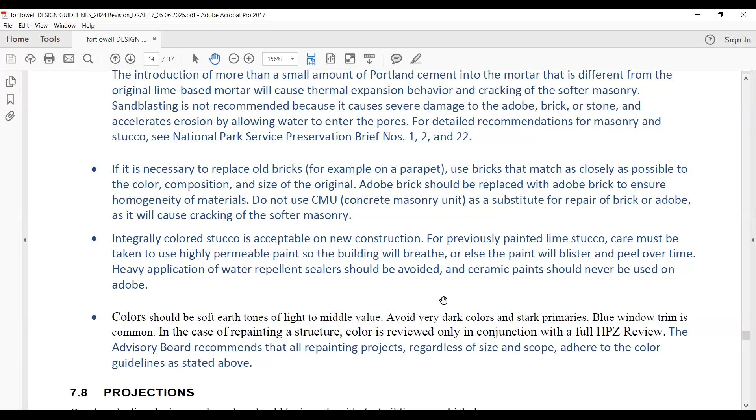One thing I'm a little unclear on is what's the recommendation if it already has cement stucco on it. The National Park Service brief recommends not removing it because it can cause more damage to the adobe. But obviously that's not what we did. I think it's case by case. If the adobe is in really bad shape, it may be best to just repair it. But if it can come off without causing too much damage, that's a better long-term solution.

Our company years ago inspected and fixed all the officers' quarters on the parade ground at Fort Huachuca. They're some of the most unusual multi-story adobe buildings, built to look like a Midwest or Eastern fort. We worked on the Inspector General's building, which had been recovered in cement plaster back in the WPA days. We took the plaster off the wall right by where the person sat, and it was down to a thin fin of adobe, full of animal skeletons because they'd lived in the walls and burrowed away the adobe. If we hadn't taken that off, it would have collapsed at some point because there was nothing holding it up.

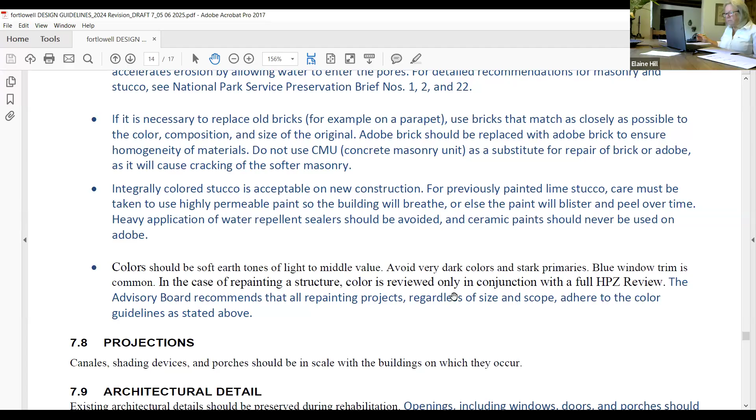The vernacular way a lot of these buildings developed, we found this out on the teacher's house, the teacher's cottage. It's not even all adobe under there, so you really do need someone to come in and create a plan, best practice. It's going to be hard to make it prescriptive within the context of design guidelines, because everything is so different, built by whomever with whatever materials they had at the time.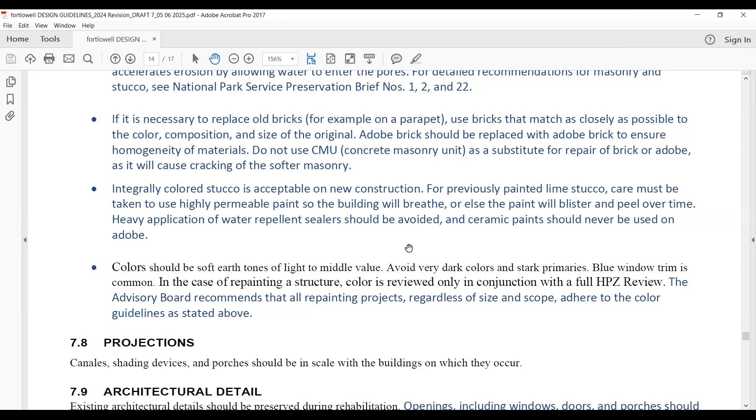I have crates in my kitchen, walls built out of fruit crates. Oh, really? Okay, let's go ahead and look at projections then. They're built out of what? Fruit crates. Wow, long time ago.

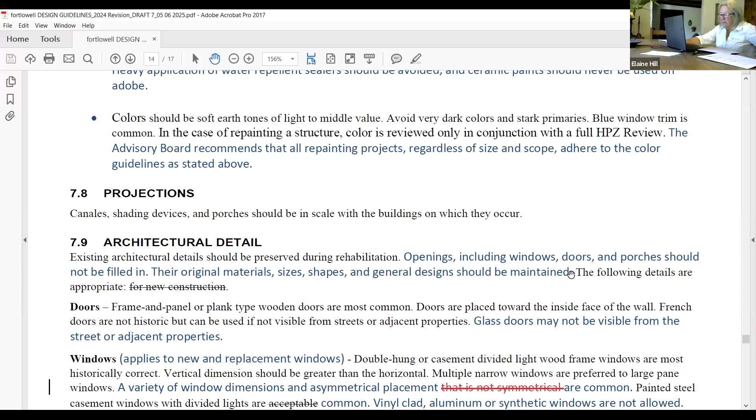Projections mostly refer to canales, shades, porches. That didn't change. Architectural detail, we must have gone through this because now I'm remembering we talked about this about openings not being filled in.

If possible. Doors, glass doors - our previous guidelines talked about French doors, but not, so we just said glass doors, we expanded a little, because now people have single light glass doors.

But they can be used on the rear in not visible spots, right? Right.

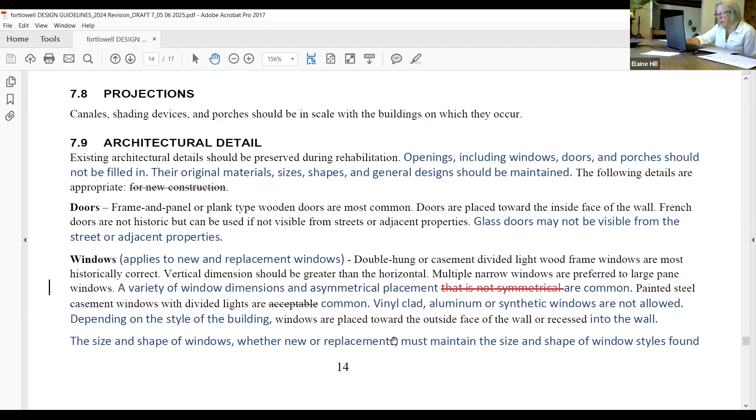And then windows - we're actually trying to help someone with a non-historic structure replace windows, so this is something to consider. This says vinyl clad aluminum or synthetic windows are not allowed, but in fact everyone wants vinyl clad aluminum or synthetic windows now. Well, and they're allowed in some historic districts too, especially - we discourage them on front elevations.

So you've had discussions about that. Well, it's come up since we put this forward, so if you have any comments or recommendations, that would be good. What do you think, Andrew and Joel?

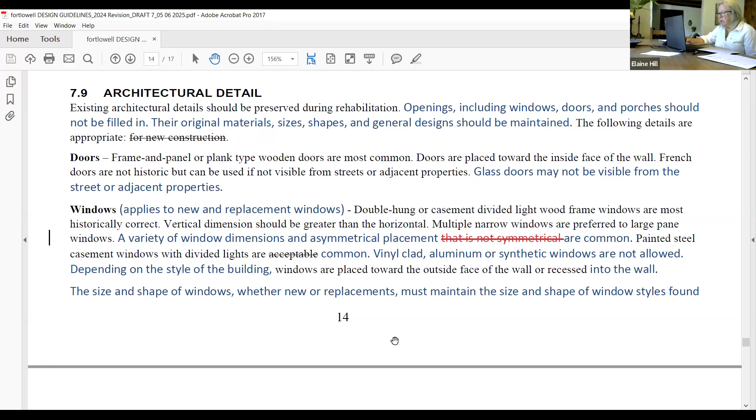I would just change the wording a bit. I would say 'vinyl, aluminum clad, or synthetic windows are not allowed,' because do you allow aluminum clad wood windows? In new construction, they've been allowed. I would probably add that in there, the aluminum clad wood windows.

I think that's a part people get confused on, because a lot of the other guidelines say no aluminum windows, and aluminum clad wood windows are a gray area sometimes. But generally they're a high quality product that most zones allow, and they're improving them now.

If you want to suggest some wording for that, yeah, I can. It's really tricky, because I always insist when we talk about this in other reviews and HPZs that we explain what it is - basically clad wood, they're wood windows on the interior, clad with something. But the way you hyphenate or structure that wording makes it interpretable in various ways. I'll add some notes here, because there's some industry standard terms that if we're aligned with will help people.

I remember West University rewrote this part of theirs and did a pretty good job, so I'll go back and look at what they did. Before you were on the commission, Andrew, West University was one of the first to propose alternatives to wood, and even brought them into the meeting room - we all inspected them and looked at the specs, it was really useful. Then looking at what was happening in preservation throughout the country to move along, there weren't enough manufacturers to do it right at the time. I think it's better now, I hope.

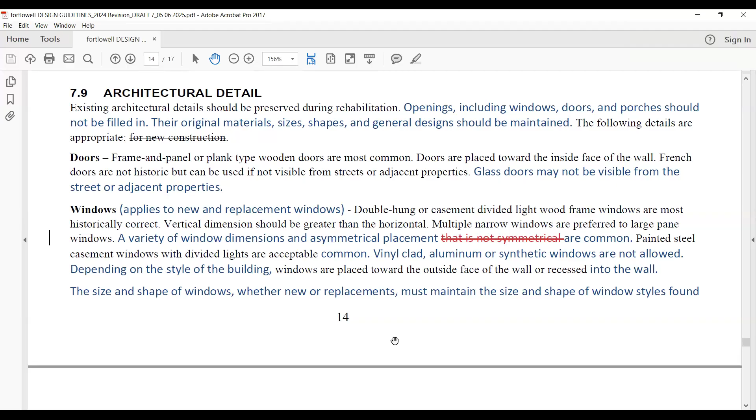Okay, move on. The profiles of the windows should stay the same. I think we're not going to provide illustrations about what windows are - there's probably enough examples now in the world of newly constructed historical replica windows.

Awnings and shade sails, unless Andrew can provide some thoughts. I understand what you're saying, but aren't windows a big topic of discussion in your area? They become a topic of discussion after they've been replaced. Yeah.

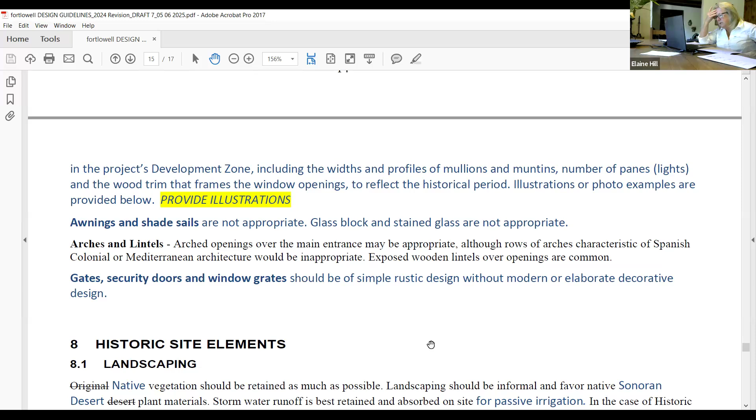I don't know, Andrew, what do you think? Yes, and in my area, a huge topic after they've been replaced too, in West University. Yeah, huge topic, but I think we've taken care of that with the language we spoke about before. So are those guidelines already published now? West University? I'm sorry, I don't know the answer to that. I'll find out. Michael, do you know?

Desiree, do you know? No one's responding. Hello? Hello? Michael's on mute. Terry, sorry. The West, you're talking of West University design guidelines? Yes. They are not yet published, no. They're still reformatting them to publish them. Which section of those guidelines are you trying to get to?

Windows. Windows. Okay, I can provide that to you, Elaine. Thank you, and copy Andrew and me, please. Or yes, all of us. I'll do, or blind copy.

Okay, great, thank you. My only edit here would be in the sentence where it says number of panes, parentheses lights. I believe typically lights is spelled LITES in reference to windows. Okay, yeah, is that up above? Yeah, oh, I see right there. Yeah, I see that at the top.

And then we've got arches and lintels. Yeah, that hasn't changed. And then gates and security. That's a good one, because I've heard you talk about the window grates and security doors without modern or elaborate decorative design. So good clarification. Okay.

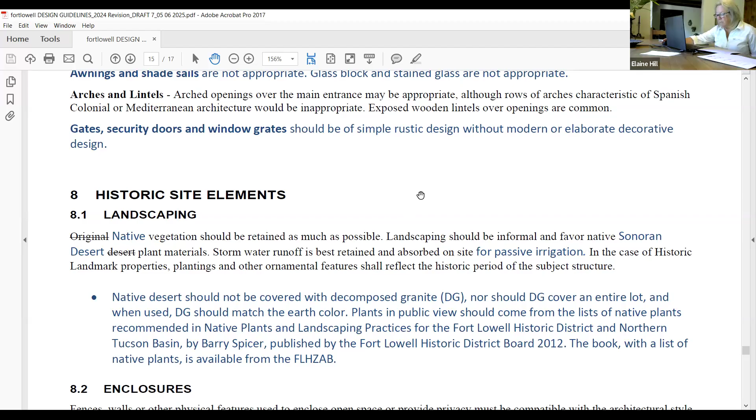Okay, landscaping. What this is missing right now is anything hardscape that's related to landscape. So things like structures that are put into landscape. Oh, sort of like garden structures and stuff. So are you going to be adding that or?

Well, yeah, we could add something about hardscape, about landscape, about little walls, seat walls. We're having a big controversy right now about boulders. Would it be helpful for you to talk to the Historic Landscape Subcommittee about some of that, like the applicability of things like the boulders and all that stuff, to get some ideas?

And that's not covered in the Spicer book? No, I think you really just need that, landscape, it's just like a landscape palette basically. So if, let's say, a garden is put on a non-visible portion of the home, or are you saying because of the placement of a lot of these homes that you would see these things that you wouldn't normally see, let's say if they were behind a house in West University, for example? So what kind of things are you disagreeing about?

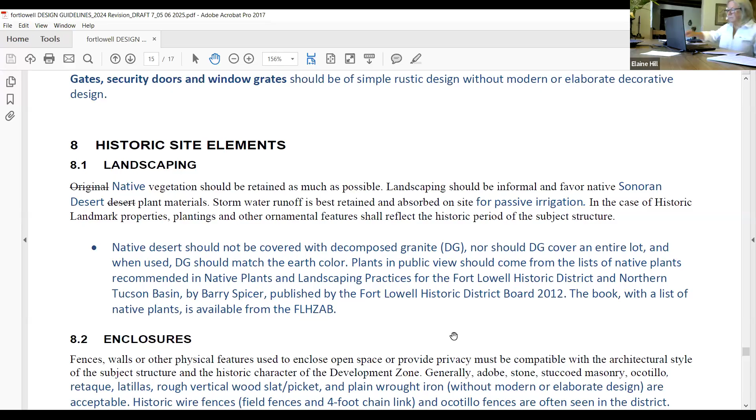This is mostly about walls, about perimeter walls. That's super important.

So the difference between what it says now and what it used to say is that it adds some other types of walls and fences that are acceptable. But the code itself says that chain link fence is not acceptable, and that's in a technical standard, I think. But in fact, in Fort Lowell, there are lots of wire fences and 4-foot chain link that's been here for 50 years or more.

So how does that work if the code says it's not allowed? Does that have to be changed at some point? Well, the way we left it, it's here, right? It's often seen in this district. If someone wanted to put in more chain link fence, that would be subject to review, but if they're already here, they wouldn't necessarily be removed.

So Michael, what is your thought on that? Madam Chair, if they are already there, already existing, they should probably be considered non-conforming. We wouldn't tell them to remove it. But if somebody is coming to put in a new chain link fence, then it is subject to review. I believe that's what Elaine was saying. But so is that wording okay as is?

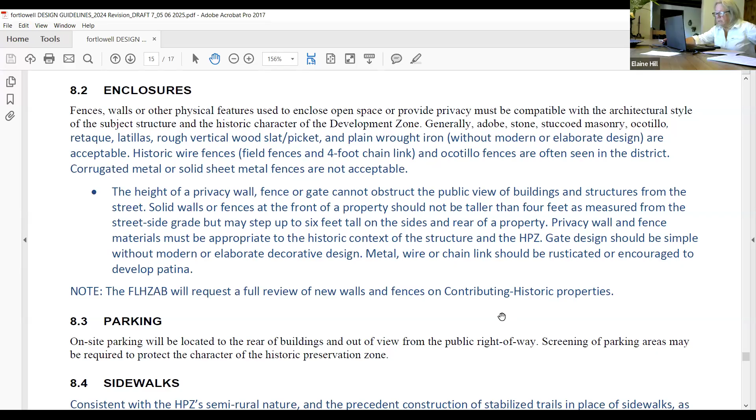Well, how many more sections? I think we're close here. Yeah, we're close. So parking, yeah, but sidewalks and mailboxes. Mailboxes aren't really regulated, and neither are sidewalks.

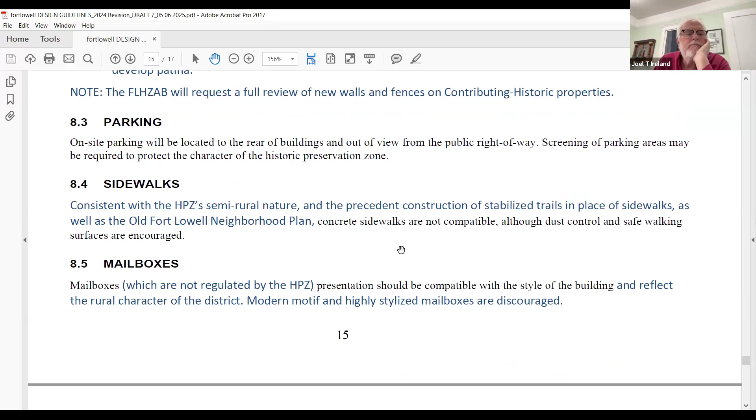I think we're gonna have to stop for the day. My suggestion is that you make the changes, that Andrew's gonna give some suggestions, and then hopefully the next meeting we'll have not more than 2 other cases. We've got to do this, or we have to do a separate meeting to finish this for you guys. But I think now there's some rewriting that has to be done with those couple sections.

And what do you think? What is the next agenda? I know you're gonna go into it later, but just so Elaine doesn't have to stress out over it, can we only have 2 other cases next time? I actually have the Fort Lowell design guideline as a continual case for the next agenda. And there will be a 4-item agenda, Madam Chair.

We might have to do a separate meeting for this to finish, because this is too much. The courtesy reviews, well, I don't want to get into that right now.

Also I think what we should all do is review what Elaine prepared so that we're fine with everything that's been changed up to this point on the agenda, because we had asked for that, so that we're not taking up loads and loads of time.

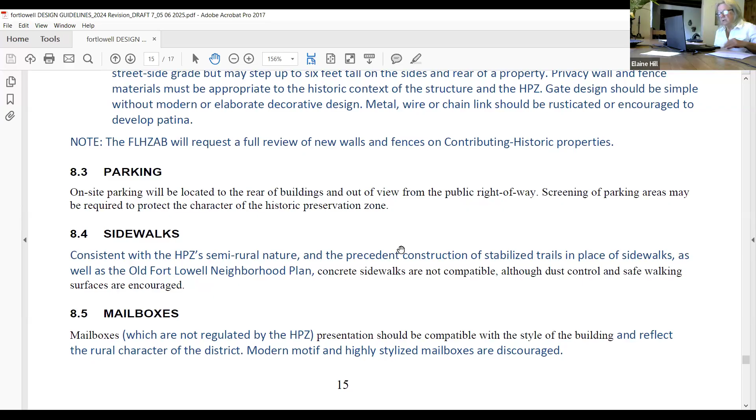So does that make sense, Elaine? Yeah, I think by the time I get the stuff from Andrew, you can incorporate that. And then talk to HLS and incorporate that. This will be, that'll be it. Then it'll be just the review of the changes, the track changes, basically.

Yeah, and I'm thinking that it might not even be, but you have to contact Steve Grady. I can send you his address, or you can email me and I can send you his address to get on their next agenda, because they have that early meeting. You have to find out when they're meeting again, or they might be totally willing to have a sooner meeting for you just to go over this.

Okay, that'll be fine, because it's so important. And then we can kind of work on when, if it's the next meeting we finish or the following one. Right, because depending on how quickly you can get on HLS. So, Elaine, do you think that you'll be ready by the 5/22 meeting?

I can be if I can get with HLS. But anyway, I'll just contact you during the time to see where we are, so we know whether to schedule you for that or to just do a special meeting for the design guidelines. Right, so that might be useful.

And if we need the time, the June 12th meeting, we could put this on there if you need, to skip a PRS. In the past, we've often done special meetings, and it's sometimes less stressful because you're just focusing on something that needs to be finished. And something like this would be a good candidate for that, for sure.

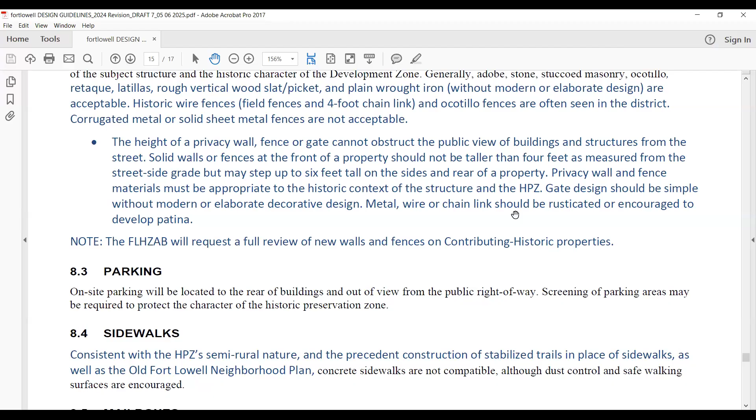Okay, or whatever you want to say, so he'll have to see if people can meet and suggest when that might be. Does that make sense? And in the meantime, we want to be accommodating. I'll try to stage that for them, so they understand what these questions are. Yeah, and they're very helpful too, especially if they have something from Desiree and from you. It's not a huge thing, they can focus on your stuff. Okay, that'd be great, thank you. All right, well, let's coordinate, Michael and Desiree, on what this looks like, sort of a sequencing of what has to happen.

And Andrew, I don't know how long it will take you to get your sections back for consideration. Yeah, I'm gonna try and get it done this weekend. Okay, thank you.

So Andrew, would it be helpful, do you want to send it to me directly? Yeah, I can do that, and I'll copy Michael too, just to keep him in the loop. And copy me too. That way you have my email, I don't know that you have it otherwise. I want to say I have it, but maybe not. If not, I will provide it. And be sure to copy me too. And if you need it, I have Elaine's email. Okay, will do. No need to copy Mary Lou, I think she's fine, she's the chair of the board. Yeah, okay.

Andrew, what section are you working on again? 7.7 and 7.9, which is texture and color, and windows. Thank you, good.

Okay, well, thank you all, I appreciate the time from you. Oh sure, and thanks for all your hard work. And so, all right, I have to find out where I am now. Take care, thanks, bye, thank you, bye.